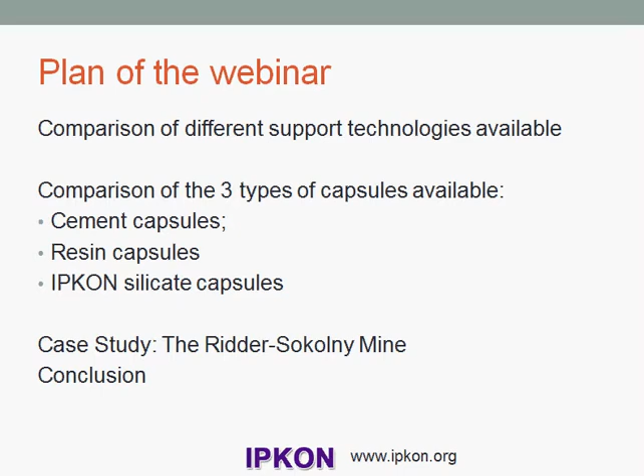So rock bolts have been in use as a roof support technology in the underground coal mines in the USA since 1936. Since then, the technologies available have evolved a great deal. This webinar will review the main types of roof support technologies available, with special attention to the different types of capsules available. We will start by describing different types of roof support technologies, and will continue with a more detailed description of the three types of capsules available. We'll finish with the case study of a mine that has been using IPKON's silicate capsules.

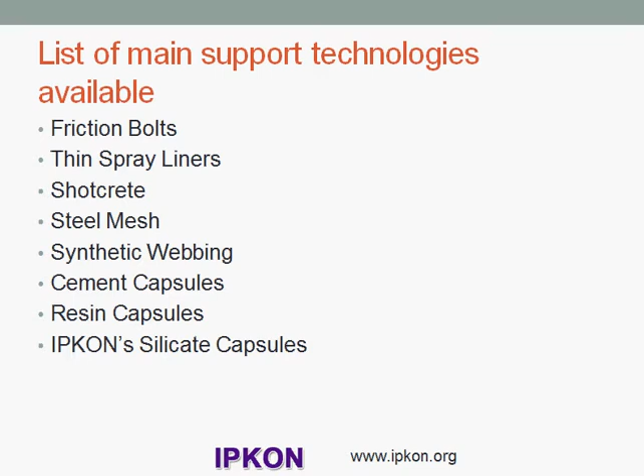The main types of roof support technologies are friction bolts, thin spray liners, shotcrete, steel mesh, synthetic webbing, cement capsules, resin capsules, and silicate capsules. So let's start with friction bolts. As their name suggests, friction bolts use the friction between the bolt and the walls of the borehole to hold the bolt in place. It is very important that the borehole be of the proper diameter. If the borehole is too big, they are virtually worthless.

They provide immediate rock support, but their load transfer capacity is poor compared to resin, cement, or silicate anchored bolts. In addition, friction anchored bolts are more susceptible to corrosion than resin, cement, or silicate anchored bolts. They are not good in friable ground as the bolt does not bond with the rock.

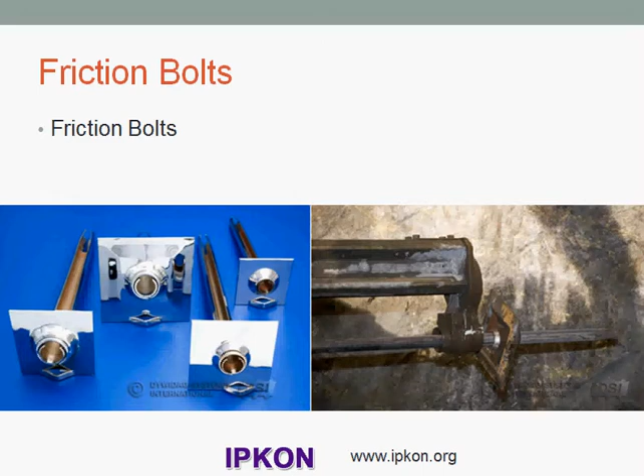Sorry. Thin spray liners. Thin spray liners fall into two main categories based on chemistry. The first category is non-reactive. This is where the applied material gains strength with time, typically as a result of water loss. This is similar to paint technology. The second type is reactive, where the applied material gains strength rapidly as a result of using a catalyzed chemical exothermic system.

Thin spray liners, or TSLs, of various types and characteristics and from 4 to 6 millimeters in thickness are applied to rock surfaces to control key block failure and to assist in localized support. The ease and speed of application of TSLs is an advantage over shotcrete application, and lightweight equipment allows for ease of transport. These TSLs assist in the locking of key blocks, which makes the rock mass more stable.

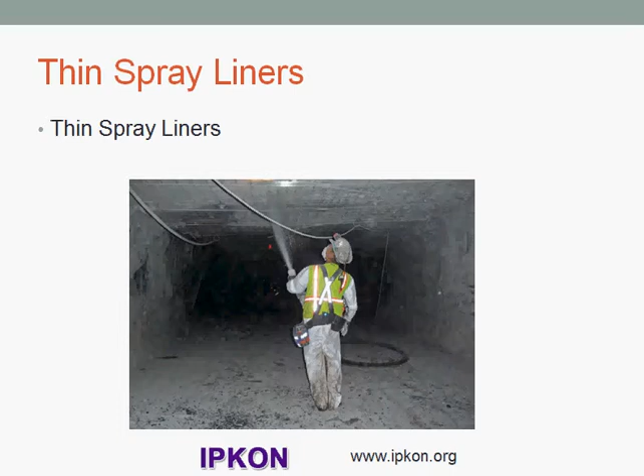The TSLs also penetrate cracks and joints in the rock mass, which assists in preventing movement of key blocks. TSLs also seal rock, which is beneficial where rock is present that deteriorates when exposed to air and water. TSLs can be used for the following applications in mines: support between rock anchors, supporting areas with limited access or logistical constraints, limiting weathering, reducing rock burst damage, reinforcing pillars, rehabilitation, and temporary support where areal coverage is required to protect workers.

We'll now speak about shotcrete. Shotcrete is concrete conveyed through a hose and pneumatically projected at high velocity onto a surface. The main type of shotcrete used in mining is dry mix shotcrete. Sorry. The dry shotcrete components, which may be slightly pre-dampened to reduce dust, are fed into a hopper with continuous agitation. Compressed air is introduced through a rotating barrel or feed bowl to convey the materials in a continuous stream through the delivery hose. Water is added to the mix at the nozzle.

The disadvantages of shotcrete are the following. First of all, the quality of the grout has always been an issue. Very rarely do operators mix grout to manufacturer specification, often relying on the operator's visual observations to determine whether the grout is of the correct mixture. Second, low slump grouts require pumps that can pump a thick grout. The choice of suitable pumps is limited.

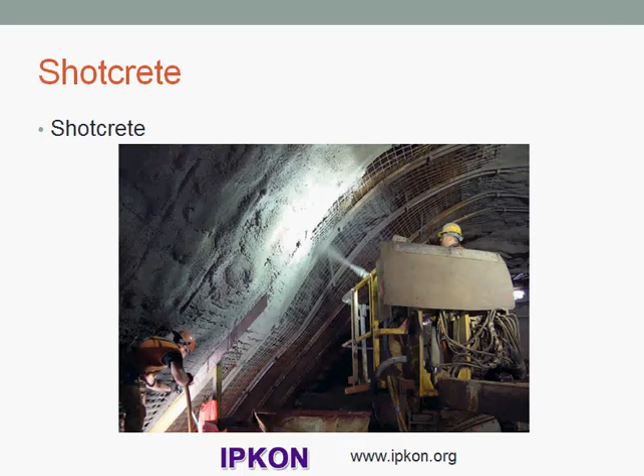Third, pumping distance is limited with current grout pumps. Operators often add more water to allow pumping long distance, which adversely impacts the quality and strength of the material. Fourth, grout is mainly supplied in 20 kilogram bags. Therefore, grout waste is excessive when a small number of rock bolts are to be grouted. And fifth, grout strength development is relatively slow in comparison to resin and silicate systems, thus making tensioning of cable systems only possible after hours of cure rather than minutes.

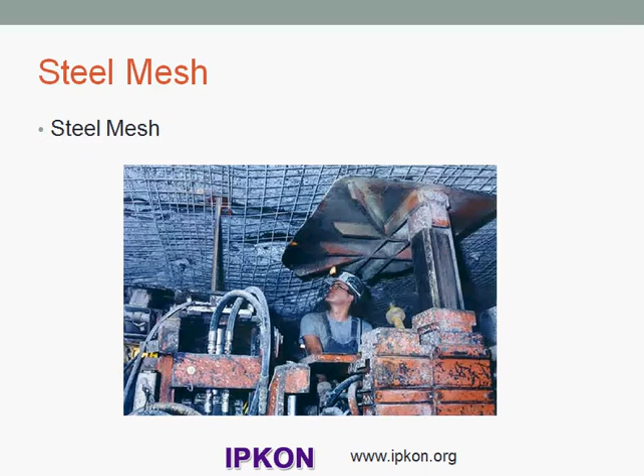I'll now speak briefly about steel mesh. Mine steel mesh provides surface support coverage to loose rock between installed rock bolts in underground mining excavations. It usually provides good control of fall of ground. Synthetic webbing is my next topic.

Synthetic webbing is used as a tunnel lining material to control loose and falling debris that often occur during mining operations. The high tensile strength and modulus allows synthetic webbing to arrest falling debris and prevent potentially serious injury to miners or damage to mining equipment and machinery.

Synthetic webbing is mostly used in the coal mining industry to complement the specialized system of roof bolting. Synthetic webbing is fitted to the roof bolts bearing plates, acting as a containment system.

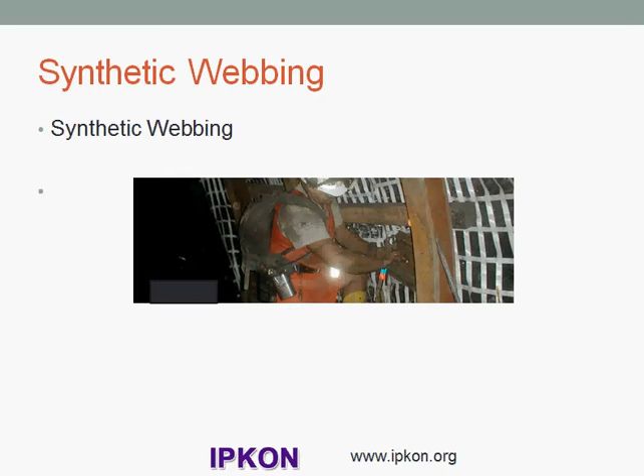We will now speak about our main topic, which is capsules. As you probably know, capsules are installed at the bottom of a borehole and allow to permanently fix a rock bolt in a borehole. Three types of capsules are currently available depending on their content. The first type is cement capsules, second type resin capsules, third type silicate capsules. IPKON perceived the following limitations in the existing capsules.

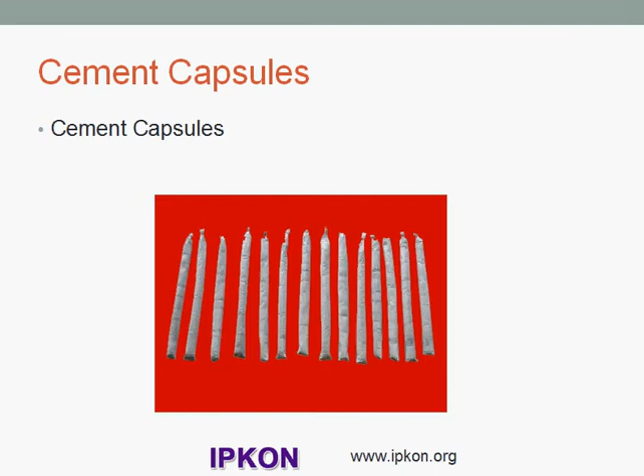First of all, cement capsules. Cement capsules have a short shelf life of 6 months because the shell of the capsules is made with a water permeable material. During their storage, the capsule is affected by any humidity in the ambient air. They need to be soaked in water before being installed. Once installed in the borehole, they take 3 to 5 minutes to stiffen. They allow for a difference in diameter between the rock bolt and the borehole of about 4 to 8 millimeters.

Resin capsules. Resin capsules are notably composed of styrene, a highly toxic material. According to the U.S. Environmental Protection Agency, and this is a quote, if inhaled, styrene vapors can cause damage to the gastrointestinal tract, to the kidneys, and to the respiratory system. End of quotation. I have another quote from the US National Toxicology Program. So the US National Toxicology Program has described styrene as, beginning of quote, reasonably anticipated to be a human carcinogen. End of quotation.

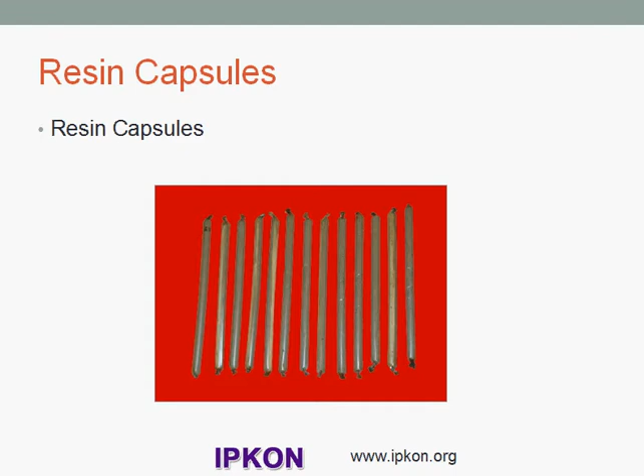So, unless the mine is equipped with a very good ventilation system, after installation of resin capsules, a mine usually has to be evacuated of all its workers for 2 to 3 hours to allow for a proper ventilation and an evacuation of the toxic vapors emanating from the said resin capsules. This can have a significant impact on the productivity of a mine.

Resin capsules have a short shelf life of 6 months because after this period of storage, the resin contained in the capsules hardens. They should be stored at temperatures below 20 degrees Celsius and can only be used at temperatures between 10 and 25 degrees Celsius. At temperatures lower than 10 degrees Celsius, the resin gets hard and does not react properly with the fixing agent. At temperatures above 25 degrees Celsius, it loses its chemical characteristics and its bearing capacity. These are not re-established even if they are stored at lower temperatures later.

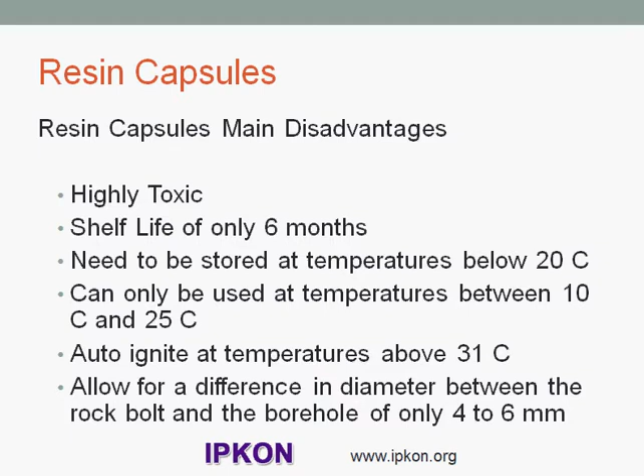They constitute a fire hazard and can auto-ignite at temperatures above 31 degrees Celsius. Sorry. They allow for a difference in diameter between the rock bolt and the borehole of 4 to 6 millimeters. Each resin capsule is in fact composed of two capsules, one inside the other. The inside capsule contains the fixing agent. The diameter of this inside capsule is 4 to 5 millimeters. With resin capsules, there is a high risk that the inside capsule will not break when the rock bolt is installed in the borehole. I will now speak about IPKON's silicate capsules.

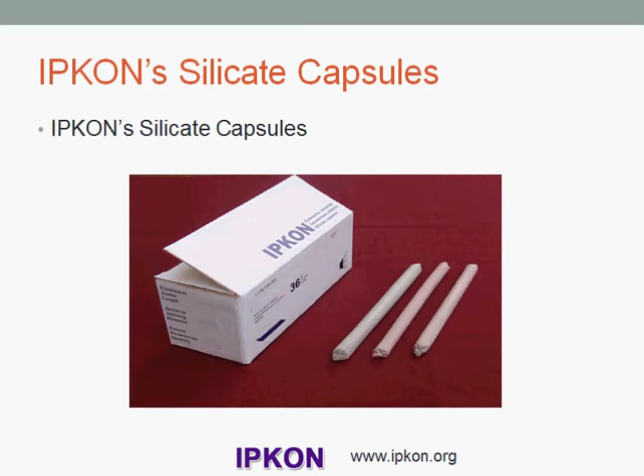IPKON invented silicate capsules in order to create a product that presented the advantages of cement capsules and resin capsules without their drawbacks. IPKON silicate capsules are the object of a patent in many countries, and a patent is pending in virtue of the Patent Cooperation Treaty. IPKON invented a new fixing agent for its silicate capsules. Its silicate capsules are entirely composed of inorganic, non-toxic, non-flammable materials. Being non-toxic, the installation of silicate capsules does not require the evacuation of a mine to avoid intoxication by styrene vapors. The stiffening time of the mixture of the silicate capsules is only 1 minute.

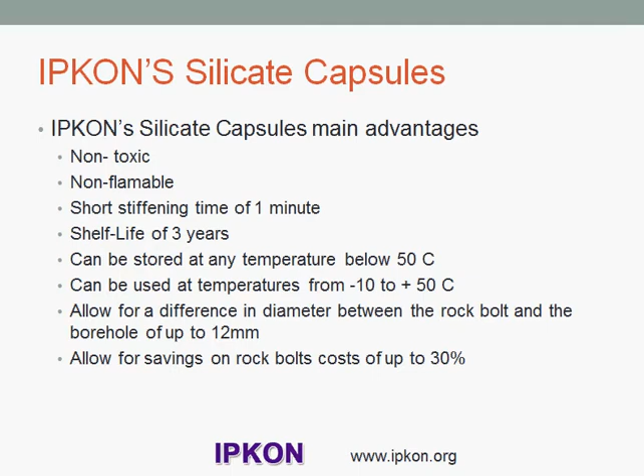The shelf life of the capsules is 3 years. They can be stored at any temperature below 50 degrees Celsius. They allow for a difference in diameter between the rock bolt and the borehole of up to 12 millimeters, permitting savings on the cost of rock bolts of up to 30%. Let me explain this. With IPKON silicate capsules, the fixing agent is inside another capsule of a diameter of 17 millimeters. In comparison, in resin capsules, the inside capsule has a diameter of 4 to 5 millimeters. In silicate capsules, the diameter of 17 millimeters of the inside capsule ensures that this inside capsule will be broken and the fixing agent will be released and will mix with the hardener.

The savings estimate of 30% on the cost of rock bolts is based on a comparison of IPKON silicate capsules with resin capsules. This is because in IPKON silicate capsules, the diameter of the inside capsule of 17 millimeters allows for a greater difference between the diameter of the rock bolt and the diameter of the borehole. With IPKON's silicate capsules, for a given borehole diameter, you can use rock bolts of a smaller diameter compared to cement capsules and resin capsules, allowing you to save up to 30% on the cost of rock bolts.

Furthermore, on average, the volume of the contents of silicate capsules grows by 2 to 3% after its installation, allowing for a tighter installation of the rock bolt. On average, the volume of the content of a resin capsule shrinks after installation.

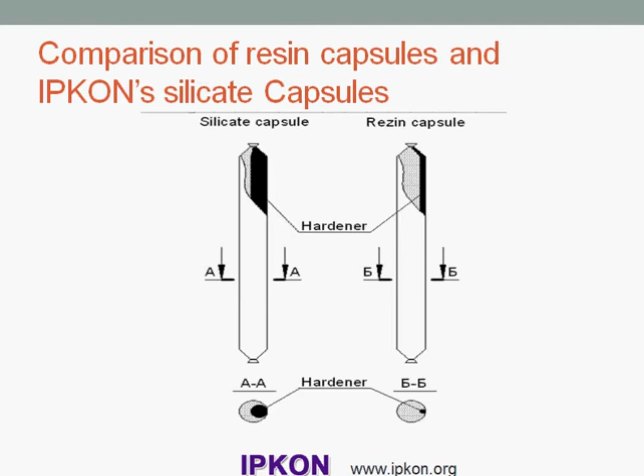IPKON silicate capsules offer permanent roof support, usually for the whole life of an operating mine. They are easy to install and provide an effective protection against corrosion. They can be installed even in a very humid environment. IPKON silicate capsules have been in use in Kazakhstan since 2009. We will now briefly describe a case study of their use.

So the case study will be about the Ridder-Sokolny mine. IPKON silicate capsules were thoroughly tested and used in the Ridder-Sokolny mine owned by Kazzinc, which is itself owned at 51% by Glencore International. This mine is situated in the East Kazakhstan region. I have a quote from Yuri Sitnikov, who is the director of the mine. He said, and I quote, after testing IPKON silicate capsules, the mine switched from resin capsules to silicate capsules as its sole type of capsule for roof support technology.

End of quotation. So, in this case study of the Ridder-Sokolny mine, boreholes were drilled to a depth of 1.6 meters with a diameter of 32 millimeters. In said holes, rock bolts of a 22 millimeter diameter were installed. To fix the rock bolts in the hole, IPKON's silicate capsules were used. In each hole, a 1.5 meter long capsule with a diameter of 27 millimeters was used. On a surface of 1 square meter, 5 rock bolts were installed around the perimeter at a distance of 0.7 meter from each other.

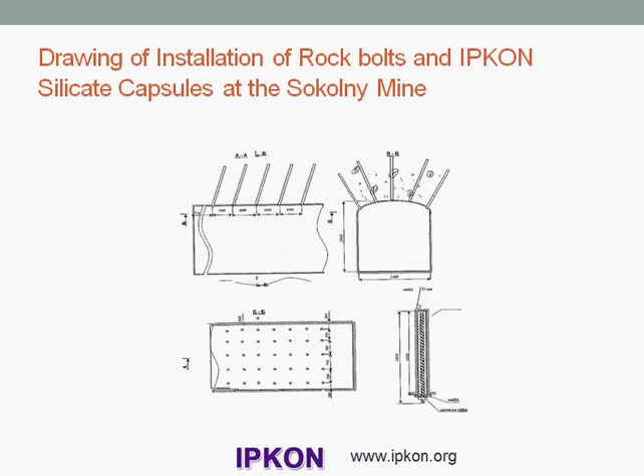To conclude, IPKON has been selling its silicate capsules with a lot of success in Kazakhstan underground mines since 2009. IPKON is looking for opportunities for its silicate capsules in the civil engineering and construction markets. IPKON wants to find partners worldwide who would be willing to act as its licensees to sell its silicate capsules abroad, both in the mining sector and in the civil engineering sector.

Dr. Balat Asien, director of IPKON, will be in Johannesburg in South Africa from December 2nd to December 4th. Dr. Asien will also travel to Canada in February 2014 and to Australia in April 2014. We will be looking for collaborators and local places to test our silicate capsules, such as laboratories, research centers, rock bolt producers, and underground mines.